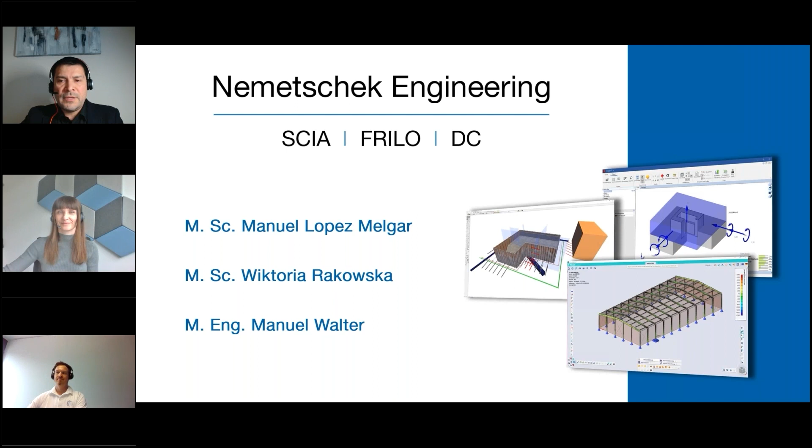Let me go through the agenda so I can show you what's coming in the following hour. The welcome and the introduction to Nemetschek Engineering will be done by Wiktoria Rakowska. She will explain more about our group. Then we will have a live demonstration of the structural analysis workflow. This will be performed by Manuel Walter, including the model calculation in SCIA, selection of a column plus loads transfer to the foundation, and also the foundation export for the extended detailing in FRILO FD+. After that, our speakers will explain the other interfaces between SCIA and FRILO.

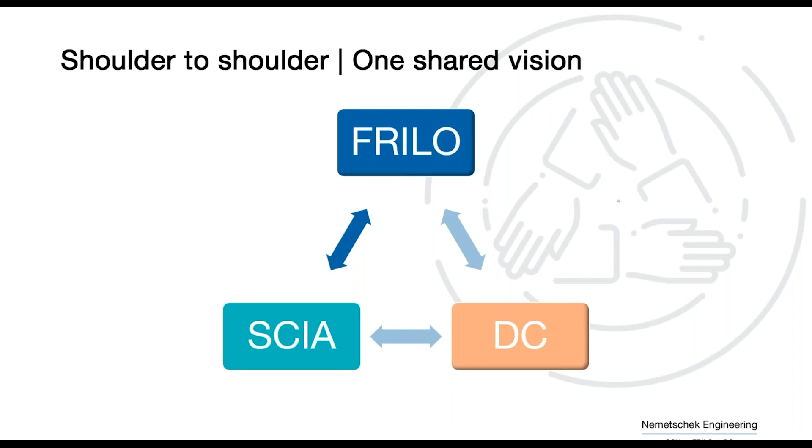Before I hand over to Manuel Walter to show you the live demonstration of the workflow between SCIA Engineer and FRILO Foundations program, I would like to summarize the benefits of the Nemetschek Engineering approach within the Nemetschek Group. First of all, of course, this comprehensiveness.

We are offering a comprehensive solution that has both tools for 3D and 2D member analysis, like the analysis and design of the complete building using the finite element method, and on the other side, the detailing, extended detailing with the granular results in the detailing individual solutions.

The second benefit is seamless cooperation. It is the interconnectivity of the solutions themselves, and also the possibility to cooperate faster, smarter, avoiding some manual errors within all of these application environments.

The solutions are developed and created by engineers that have experience in structural engineering themselves. This is why they are very close to the needs of the users, and they can understand very well which features are required, and then develop very intuitive solutions that don't need long onboarding time.

Integrated BIM workflows means that we are not only interconnected within the three brands, but we are open for outside, and we are able to exchange files with external solutions in IFC and SAF file formats that are supported by most of the brands on the market, and we will work on continuous development in this direction as well.

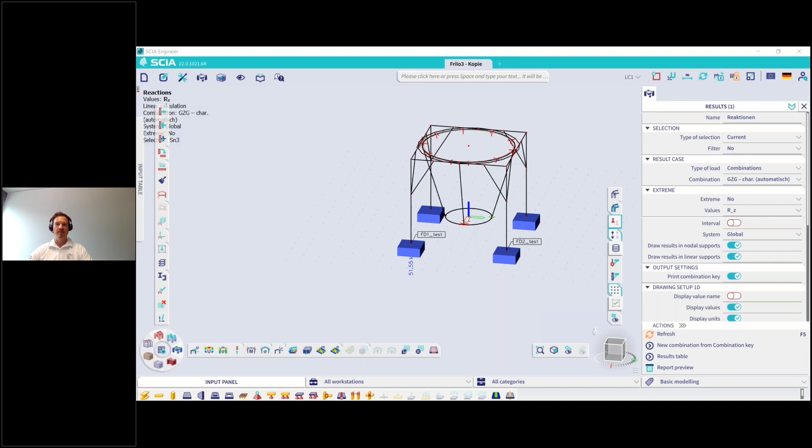To our FRILO FD Plus module, to calculate the foundations more in detail. I would like to start with a model, an existing model on the SCIA side.

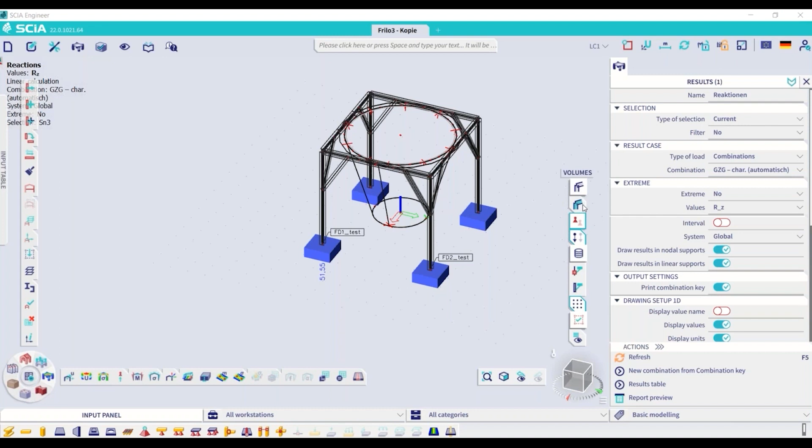So that's the model I set up for you. Let's say it's some kind of a water tank or a container building. I can show you the volumes, for example, and the shadings as well, so now you can recognize a bit better how the model is built. We have 4 columns and 4 foundations.

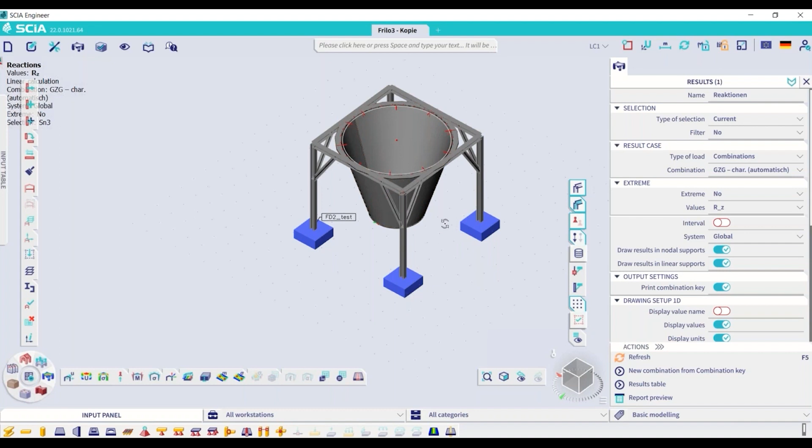I would like to show you later on how those foundations can be transferred into the FRILO world. Of course, we have some beams on top of the columns, and we have a shell object representing the tank itself. The tank has a bottom, and this is modeled as a plate element in the end.

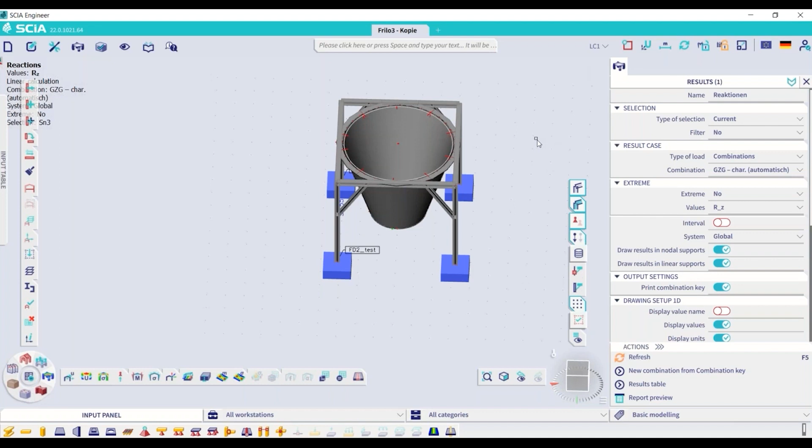Let's have a short look on the different load cases I have set up. Of course, we have the dead weight of all the components of the model that are calculated automatically, so we don't see the loads in detail right now.

Then I've set up a second load case, a snow load case. Sorry for the German names, but those are just the load case names defined by me. So we have some snow loads distributed on top of that tank, for example.

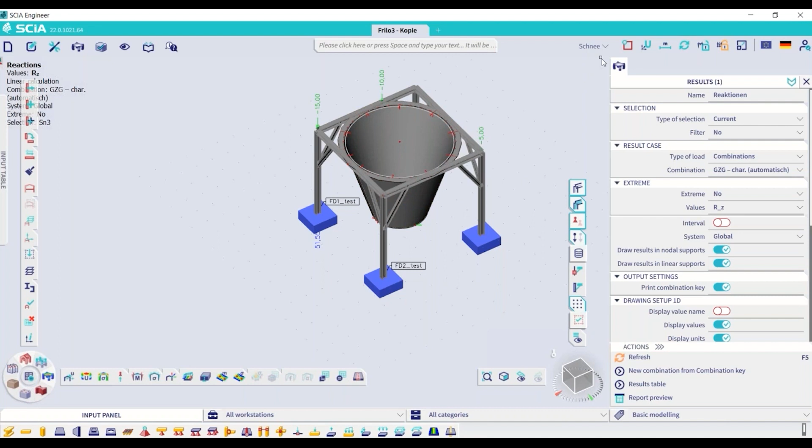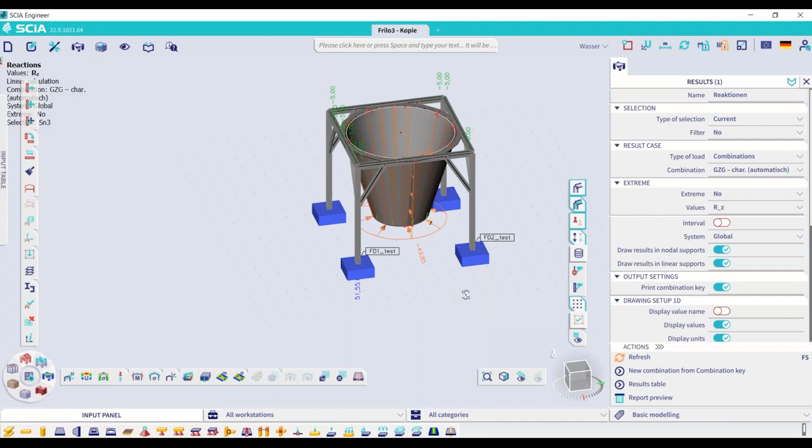And then of course we have a water infill. The load case assumes that the tank is full of water, with the water level at the very top. Therefore we have a circular force distribution at the bottom due to water pressure, and a linear water pressure starting from the top with its maximum at the bottom of the tank.

Yeah, and just to show you another load case, I added some wind loads on one side of the tank, to make sure we have a couple of live loads available in the model to show some specifics of the load case combination and stuff like that.

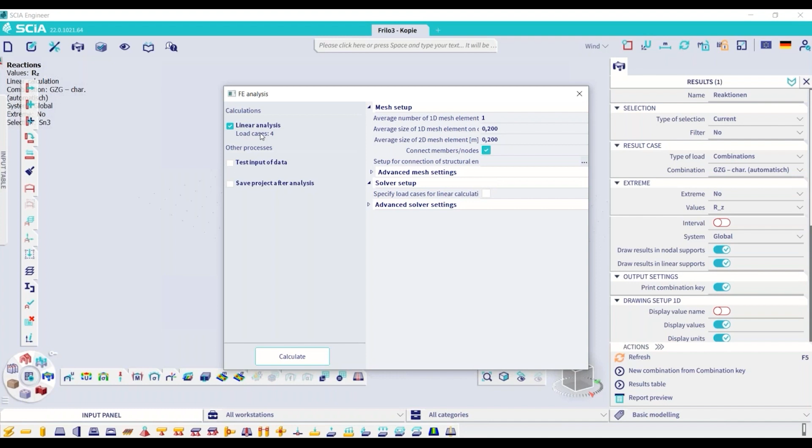Okay, so after that, when the model is defined well and all the loads are in place, I can start the calculation. In the end, it doesn't matter whether it's a linear or a nonlinear analysis, since we are transferring the loads calculated within SCIA Engineer. So to keep it simple, I would like to show the workflow just using a linear analysis.

Once the analysis is done, the next step is to figure out which foundation is the most dangerous one, which needs to be calculated in detail afterwards. I would like to have a look at the resultant forces in all four foundations. Therefore, for example, I will choose the resultant function, and I use the reaction force.

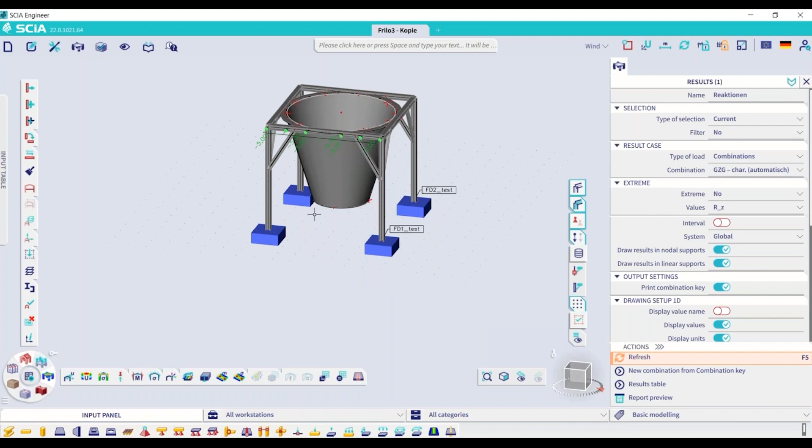Okay, so now I select all the foundations. And I would like to show, for example, the resultant internal force, the vertical force, to localize the most important foundation.

So I choose the type of loads. In that case, for example, I choose all the combinations, all the design combinations that are done internally automatically.

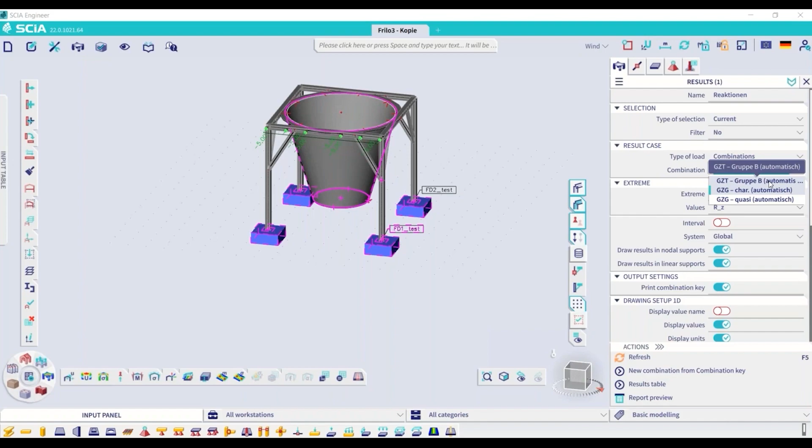And after refreshing the model, we can see the resultant forces in the foundations for each of these four foundations. So in the end, I figure out that the foundation I named FD1 is the most important one, because the resultant force in vertical direction is the biggest one.

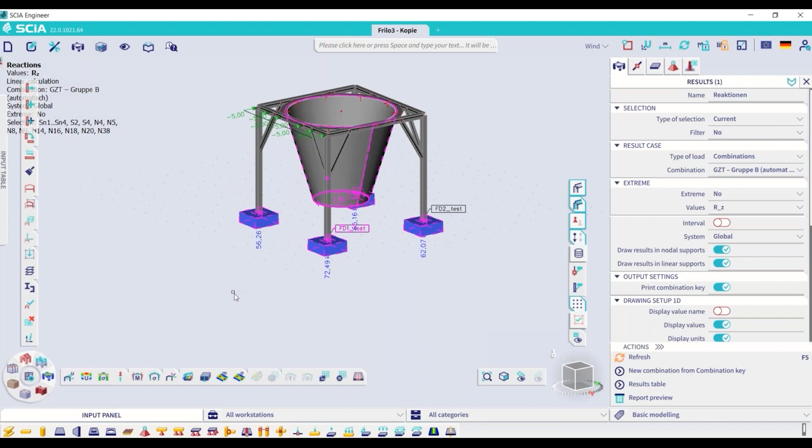And I would like to show the workflow to bring all this information now to the FRILO design model, according to that foundation that I named FD1.

Okay, so next step, I will delete the results just to show you the way to transfer it a bit better. And then we need to clarify which foundation I want to hand over. In that case, I can type in the search field up here.

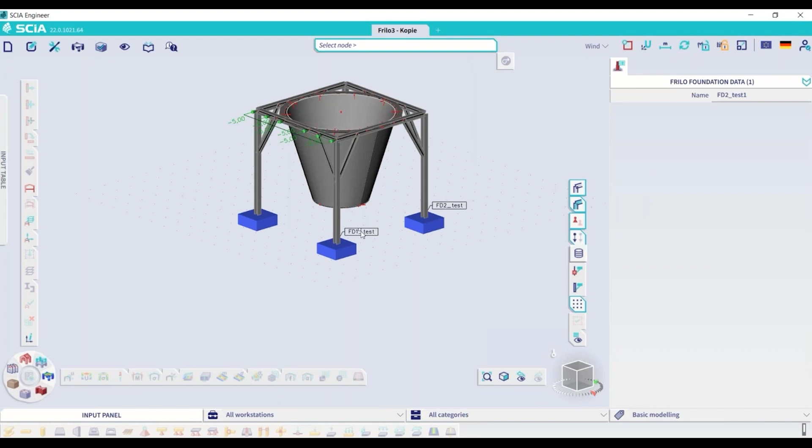For example, the function is called FRILO foundation input. That's the first step, because I need to name the foundation as a previous step. Otherwise, I can't export it into the FRILO foundation module. So I can type in a name for that foundation, for example.

And afterwards, I need to select the node. By doing this, the foundation is named in the end, so I can see the user-defined name. That's a very important step, because without that name, you are not able to hand the foundation over into the FRILO world. So that's a necessary step that needs to be done first.

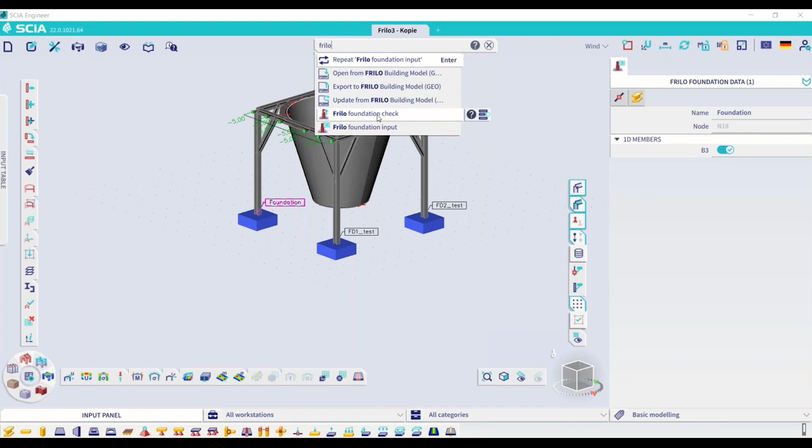After that, I can call the other FRILO function. It's called FRILO foundation check. So now we are going to hand over all the necessary data automatically into the FRILO world.

First of all, the most important thing is to choose which loads and load cases you want to hand over, because the foundation design depends, of course, on the loads or load cases you hand over. Therefore, it's very important to know whether the calculation is done on a linear or a non-linear base, because if it's done on a linear base, it's not necessary to hand over design combinations.

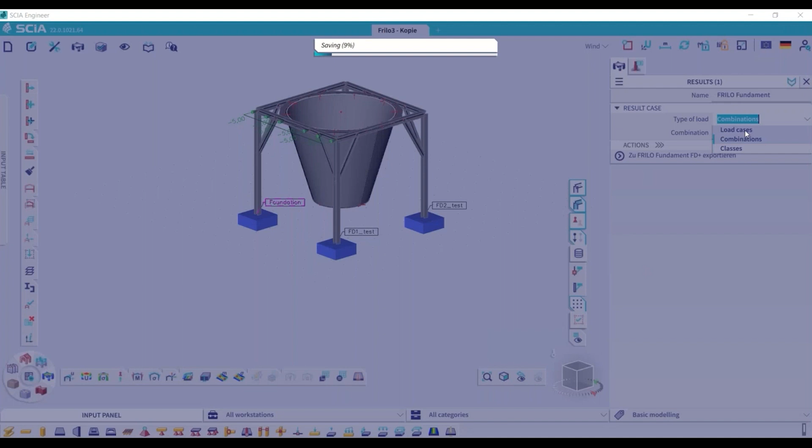So in that case, you might hand over just single load cases on a characteristic base, because the combinations can be done on the foundation side itself. For example, if the calculation is linear, additional internal forces according to theory of second order are not taken into account. So if the calculation is done in a non-linear way, you should hand over the load combinations that are automatically or user-defined done by SCIA Engineer. We need those additional internal forces.

According to theory of second order, for example, to take them into account in the foundation calculation afterwards. So that's the first step to be done, and I will show you both steps. I'm going to start by handing over single load cases. If I type in load case, I have the choice to choose one of my 4 predefined load cases and hand over those characteristic internal forces in the single foundations.

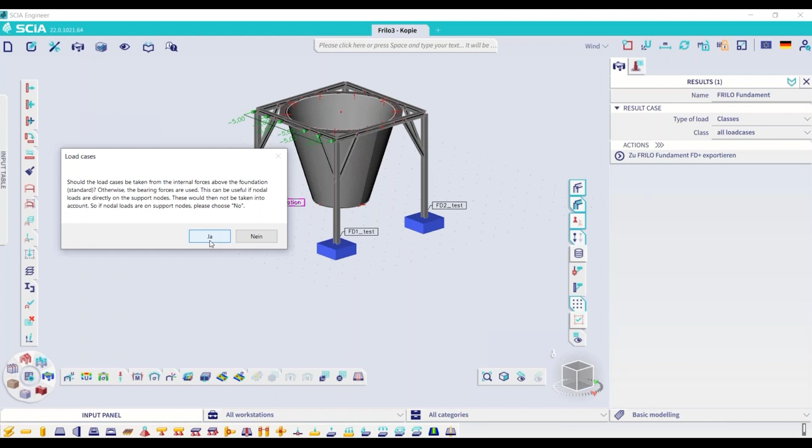So what's the difference? The difference is only important if we have additional loads besides that support node. For example, if we have a load that is directly acting within that node at the very bottom of the column, or if we have a load which is localized on the foundation itself, that load doesn't affect the internal forces of the column. Therefore, if we would like to take these additional loads on the node or on the foundation into account in foundation design, we need to hand over those support forces, because only in the support forces are additional loads included. That's the difference. As long as there are no additional loads available, I would suggest always to use the function yes and to hand over internal forces, like in the model here.

So in that case, I type yes, and then automatically in the background, the FRILO Foundation module starts. I will show you the result in a couple of seconds. Now we are done.

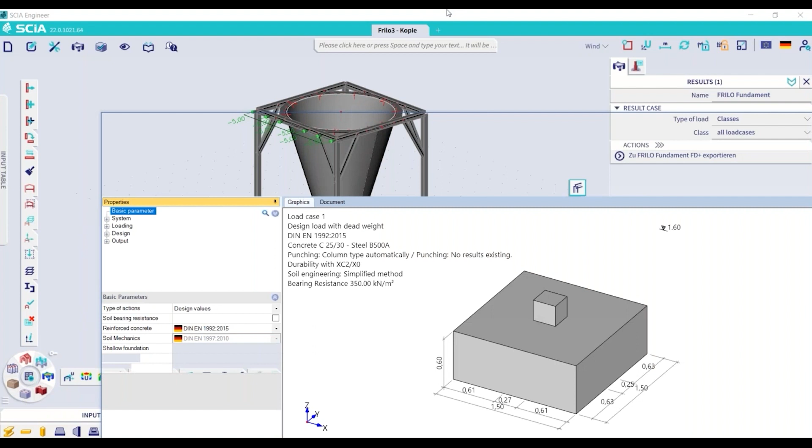And that's the model which is handed over from SCIA Engineer to the FRILO Foundation module automatically. So we can see all the geometry is predefined according to the values that I have chosen in the SCIA Engineer model. And of course, all the load cases that I chose to hand over are available right now. So I'll show the load case table.

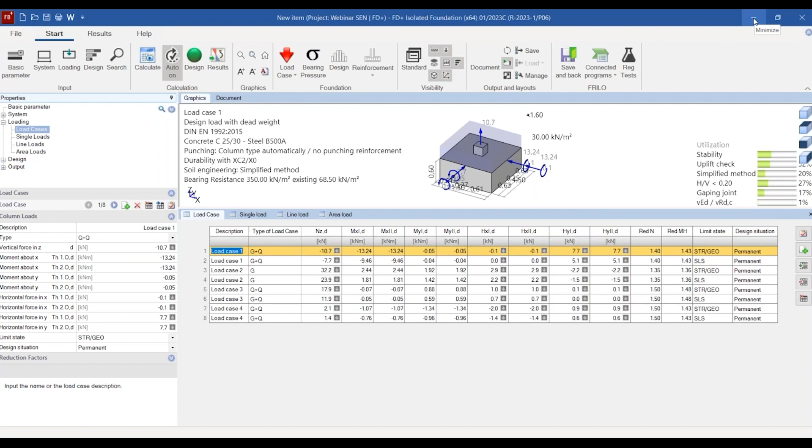In that case, I handed over the single load cases, and what we can see is that we now have 8 different loads available, and in the end the combination of these single loads to get design combinations is done within the FRILO module itself. That's the first way we can go from SCIA Engineer to FD Plus by using that link.

Now, let me show you the other way as well. So in that case, just imagine the calculation on the SCIA Engineer side was done in a non-linear way, so we would like to take theory of second order into account. And in that case, I would choose to hand over combinations, for example the ultimate limit state combination on a design level, meaning including partial factors of safety bigger than 1.

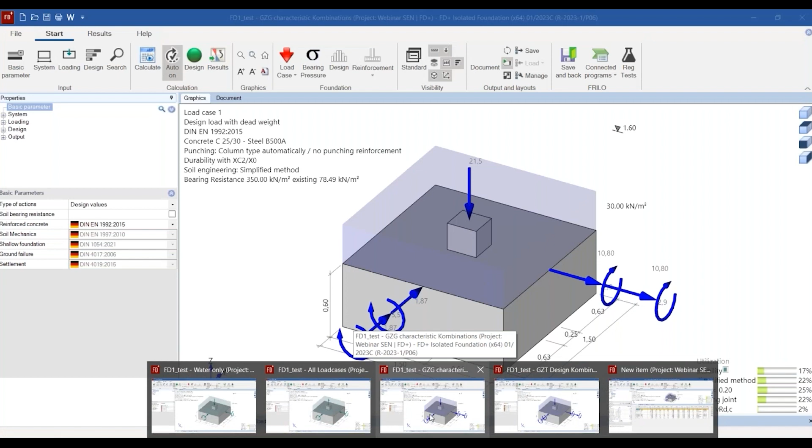Then I choose, for example, another foundation. So I take FD2 now to hand it over. And in the end, the same process is started, and the foundation module will open in the background. Once again, we need to choose whether we would like to have internal forces or support forces. In that case, I will show you the other way, so I choose the support forces.

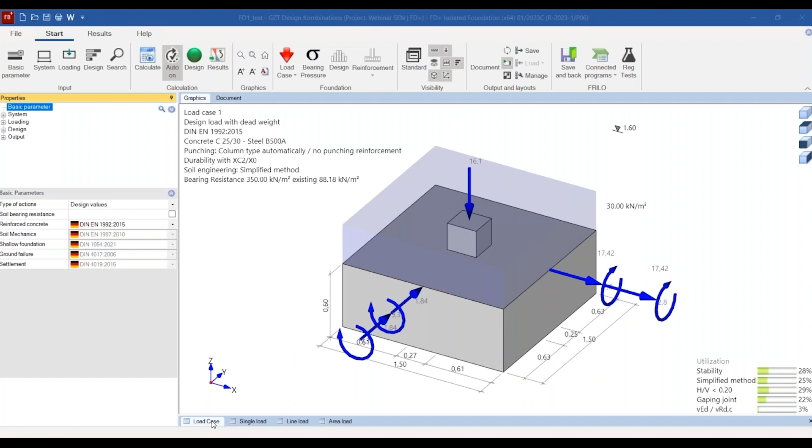And of course, in the end, we will end up with a big amount of combinations that are handed over, as you can imagine. So by defining 4 different load cases, we will have a lot of possible load case combinations, and all of them are handed over. We don't sort some of them out or anything like that. So we handed over all the single combinations into the FRILO module.

That needs a bit of time due to the amount of available combinations, because the calculation in the FRILO module is done automatically in the background. In case you change anything, the foundation is recalculated in the background automatically, and that's why it takes some time according to the amount of load cases and combinations.

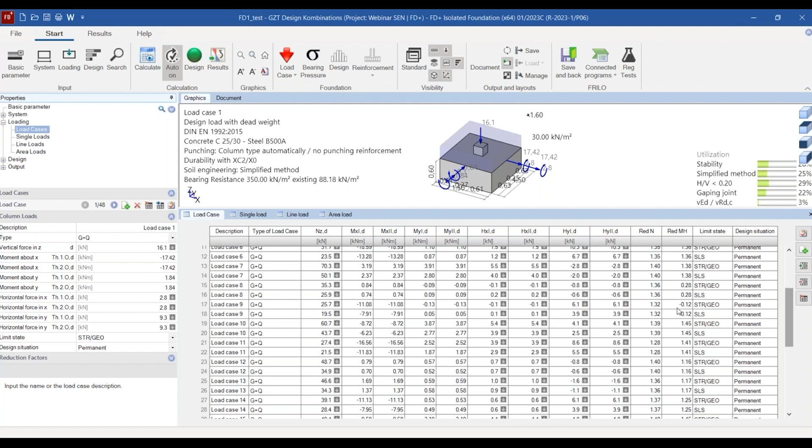Now we can see all these combinations that are handed over, and I would like to say something about the details in those combinations. As we can see, we have an index D, meaning that we are talking about design values. And if we had a nonlinear calculation, we can see that by regarding the single components of the internal forces. For example, we have a moment around the x-axis according to theory of first order, that's the first column, and we have the same moment according to theory of second order.

In that case, the values are the same, which means that we don't take theory of second order or nonlinear calculation into account. Once a nonlinear calculation is done on the SCIA Engineer side, you will see a difference between those 2 values, and that's the sign that in the foundation calculation you can take these additional internal forces from a nonlinear calculation into account.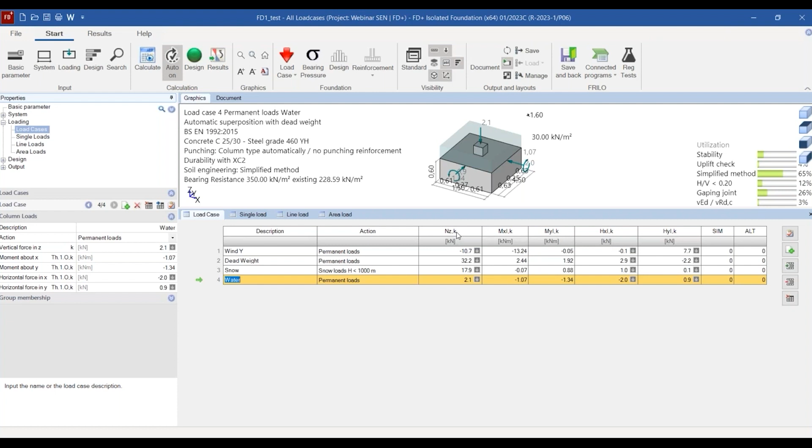You can recognize it at the index K right here, or within the basic parameters. There you can choose whether you would like to work with characteristic values or with design values. Of course, I've set up the standard according to the National Annex of Great Britain. That's why British Standard EN 1992 is chosen, the standard for concrete design. And according to that, the geotechnical British National Annex of EN 1997 is predefined automatically as well.

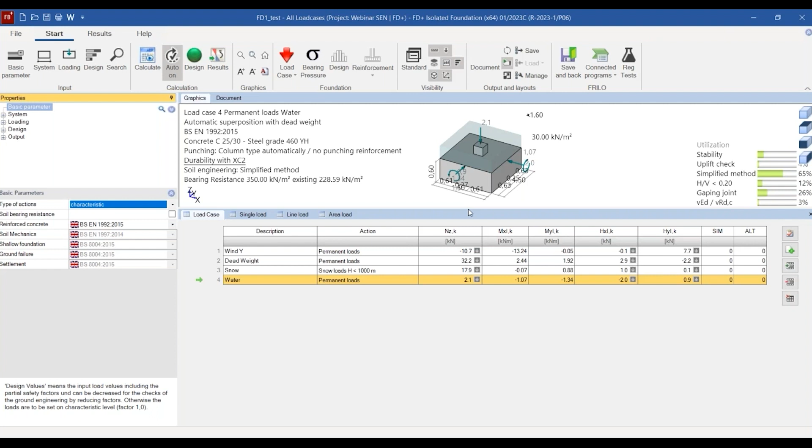Of course, after the calculation, we have some detailed information about the checks that are done internally. So as I told you, we are calculating all the checks automatically in the background, and that's why you can see within that structure here already in the user interface whether the foundation fits or whether it doesn't fit.

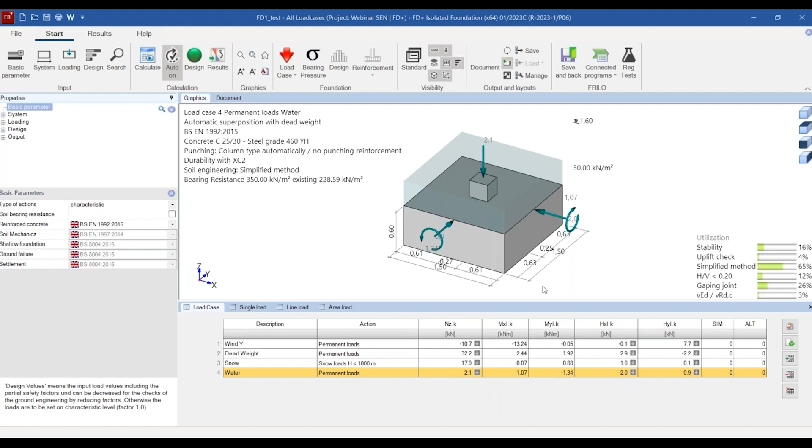So what is shown is the utilization factor, and so far, if we are below 100%, the foundation fits and might be optimized somehow to get the utilization factors a bit nearer to 100%, for example. So if it doesn't fit, you will recognize it immediately.

For example, I could change one of the measures here, do a recalculation. And after that, I will show you, for example, what can be chosen, so which soil mechanic checks can be handled. So for example, I change the method from a user-defined or simplified calculation method to a more accurate one.

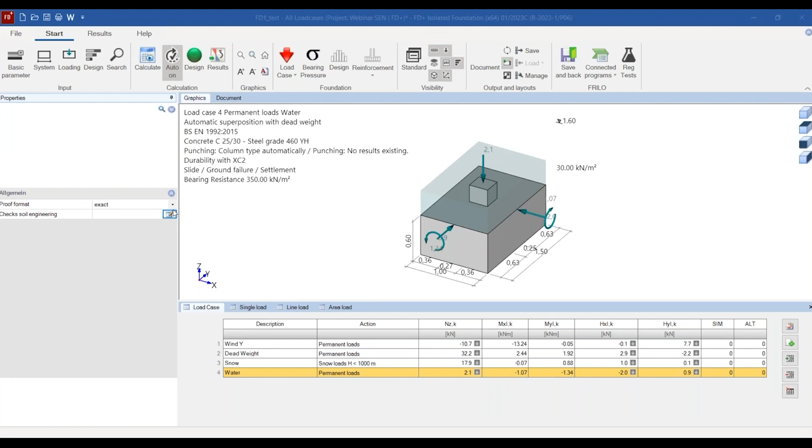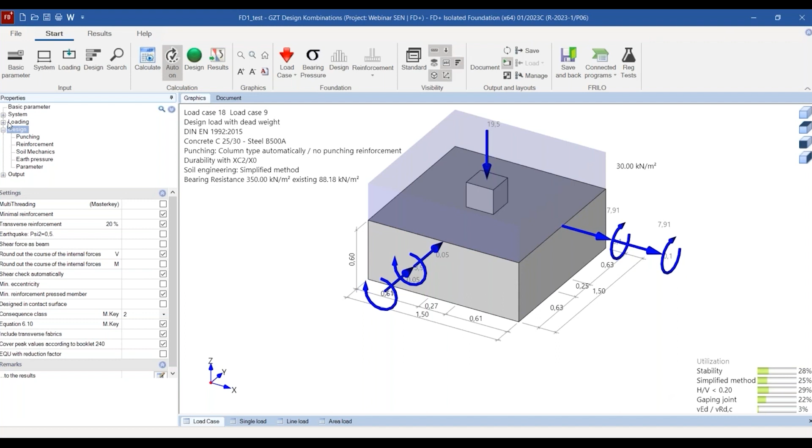And in that case, I will show you the function where you can choose which check is done and on which basis. Okay, so now the calculation is running. And I will change to the results right now. Now you can see the calculation results according to the choice I've done before.

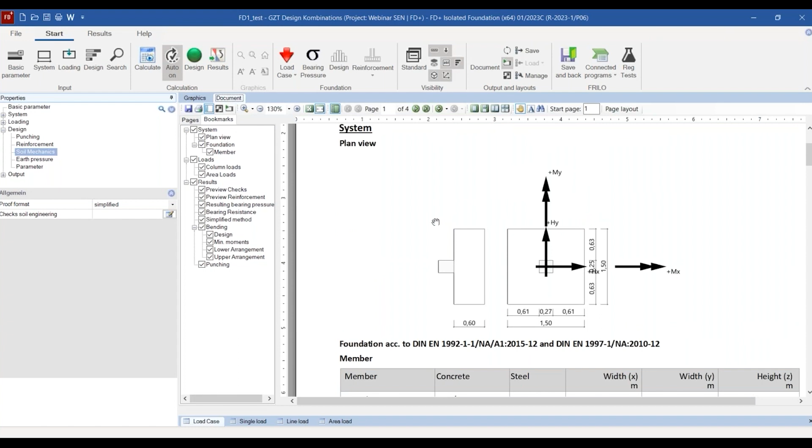And of course, in the end, you can have a really detailed output file which shows all the calculations that are handed over, that are calculated internally. Of course, we see all the load cases once again, so they are listed, so we can compare them with the internal forces or the support forces on SCIA side.

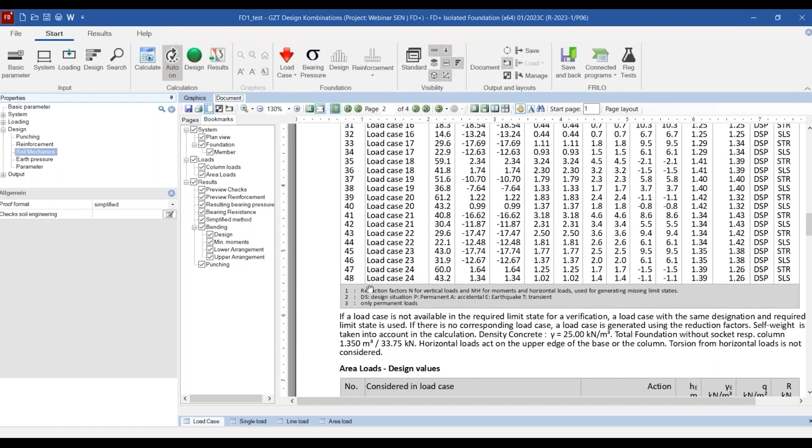For example, these load cases are handed over. We can see we have 48 in that case. That's pretty much for such a simple foundation, I think. And in the end, we see an overview of the results. That's this table. And within that overview, we see all the utilization factors, for example, for each check.

So we can simply prove whether the foundation fits for the geotechnical design in the first table. And we see the reinforcement that is necessary coming from the bending design, the shear force design, and the punching design. So that's what we display,

at least if we choose, for example, a short or brief output file, and if we choose a detailed output file, all the information that is calculated, all the values that need to be taken into account in each check, is printed out in the end.

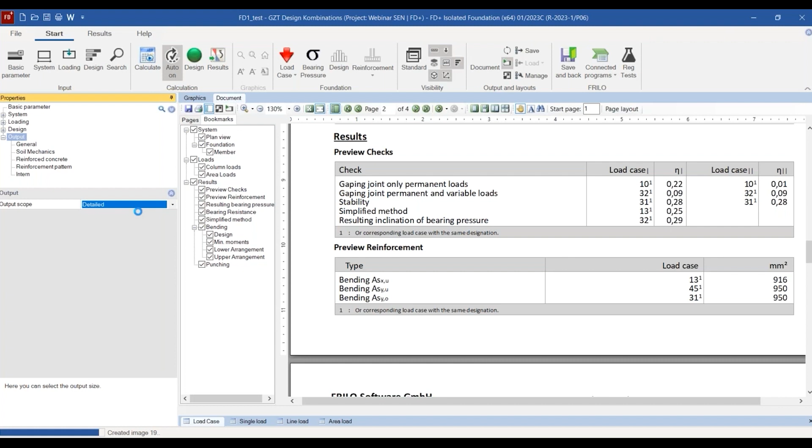Okay, so one last thing I would like to show you. We are talking about a single foundation, an isolated foundation in that case. But it is also possible to calculate socket foundations, for example, or pad foundations, and therefore, of course, we have a load transfer and a model transfer to all of our other FRILO foundation modules.

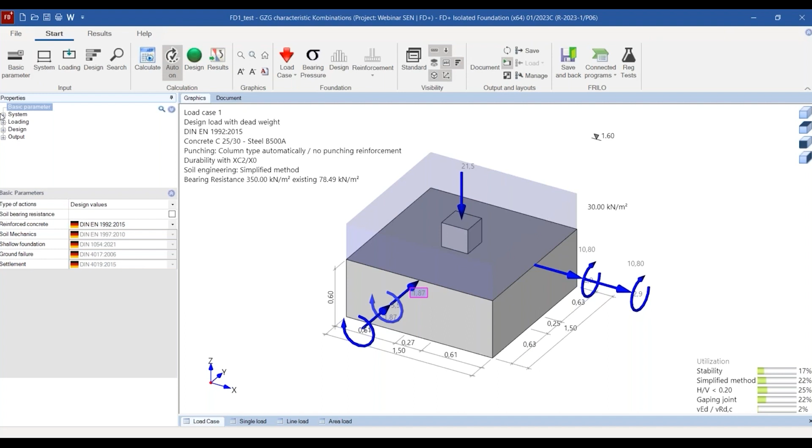So let me name them. We have a module called FDB Plus. That's a pad foundation, meaning an internal socket in the foundation. Within the FD Plus module, we can also calculate foundations with an external socket. I can show you that by choosing the option that we'd like to model a pocket as well. That could be an internal one or an external one.

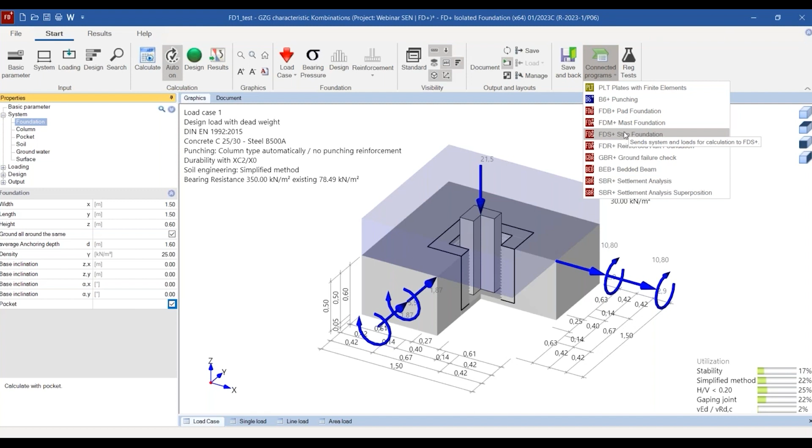The next possibility is to calculate it as a mast foundation, meaning a foundation which is founded a bit deeper in the soil. It's calculated by having an equilibrium between active and passive earth pressure, for example, for masts or stuff like that.

Then we could hand it over to a strip foundation, meaning that we would like to have a foundation strip. In that case, we are talking about walls and not anymore about columns. So the column is going to be extended and modeled by a wall in the end.

Then we do have a module to calculate reinforced rim foundations. That's quite often needed if we are talking about foundations in inner city buildings. Just imagine you are near the border to the next house, and in that case we need to calculate a rim foundation that is loaded externally at the very edge of it.

And the last possibility is to calculate the entire foundation as an elastic bedded beam instead of a rigid foundation. That's sometimes very important if we are talking about big foundations that have a low stiffness, for example. In that case, the better calculation model would be to have it as an elastic bedded beam.

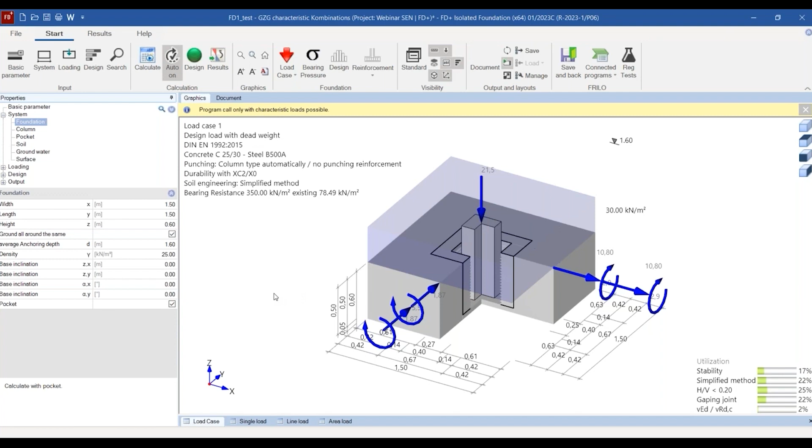Well, so that's it from my side, showing the link between SCIA Engineer and the FRILO Foundation module, how to hand over the loads. So just to summarize a bit, always be aware of which type of calculation is done. So is it a linear one or a non-linear one? And according to that calculation, define which loads need to be transferred.

So are we talking about characteristic loads? That is absolutely sufficient if we have a linear calculation to hand over characteristic loads. And in case of a nonlinear calculation of the 3D model, it's the better way to hand over the design combinations to have these nonlinear effects and these additional internal forces to take them into account.

Well, and in the end, the calculation can be calculated in detail with the foundation module, and the results are all the geotechnical checks, of course, and the design of the reinforcement for bending, for shear forces, and for punching shear. Yes, and in the end, once all the checks are done, you can just print out the result list or the result document and add it somewhere into your entire calculation document, for example.

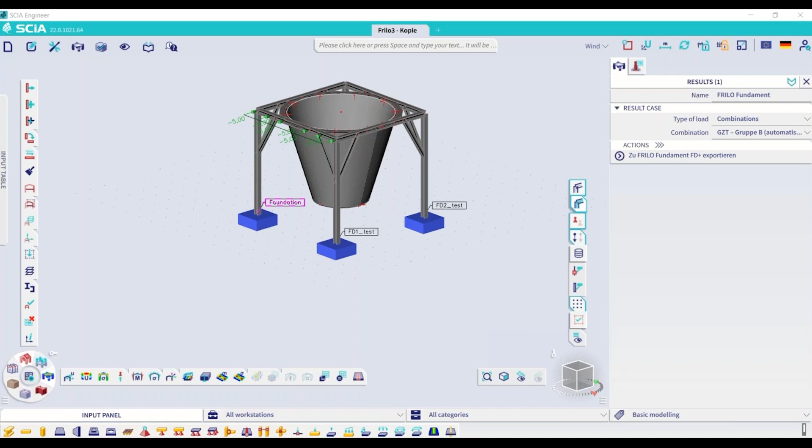And another information that I would like to share with you is what other interfaces or connections are available right now between the FRILO and SCIA solutions. And maybe, Manuel, you can give me back, yes, exactly, so that I can share my screen for a while. Okay. So I hope now you can see my screen.

Yes. And what I wanted to mention is that apart from the SCIA Engineer and FRILO Foundations interface, we already have available and delivered the masonry wall connector from SCIA Engineer directly to the masonry wall calculation solution of FRILO software. There is one more interface that is available already for a certain time. This is the connection based on SAF file transfer between the FRILO building model, which is called GEO. This is a load descending or load distribution program of FRILO software that allows you to distribute the characteristic loads in the entire building and assign them to the individual building components.

But in case we have some situations where the floors or the storeys are not placed exactly over each other, or we need some extended earthquake analysis, then we do need to calculate such a model in the 3D structural engineering solution. Then we are able to smoothly transfer the entire building model from FRILO to SCIA Engineer, so the other way around.

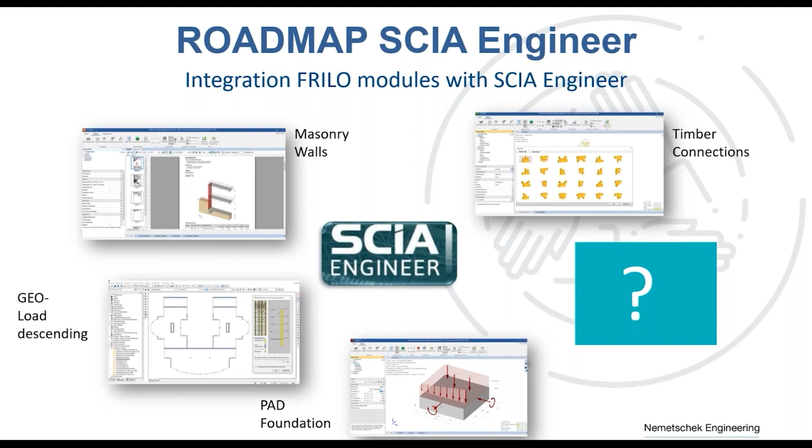Another interface that we are currently working on is the timber connections of FRILO. The program is called HO1+, and it's offering a wide range of timber connections, as you can see on the visualization in the slide, and it will be available already in May in the next release. And we are planning, of course, the developments in the direction of the interfaces between FRILO, SCIA, and DC software for the next releases as well. And we would be very happy to find out what features or what interconnectivity is helpful in your projects, in your everyday work.